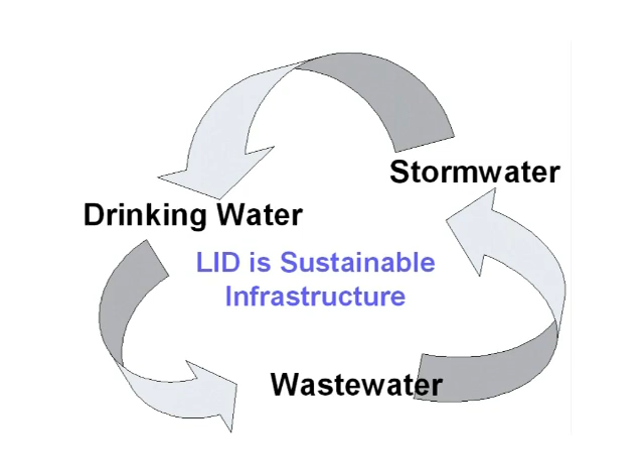I've seen some interesting design manuals say put LID everywhere. I want to kind of kill the myth that what we're trying to do is develop one piece of the watershed puzzle, because you have LID, you have gray infrastructure, you have centralized controls, and you have restoration techniques. Put them all together and you have a very powerful watershed tool.

The key to LID, and a lot of things you're going to see today, is that it's technology and performance based, which is quite different from the typical stormwater structures we've been seeing. What we're really doing is making stormwater into a business. We're making it into an industry, which is quite different from the traditional approach.

So instead of having a pond built the same way every time, we're trying to look at what is the most efficient technology and let the marketplace decide, let the local region decide what it is, and let the market really develop the new techniques.

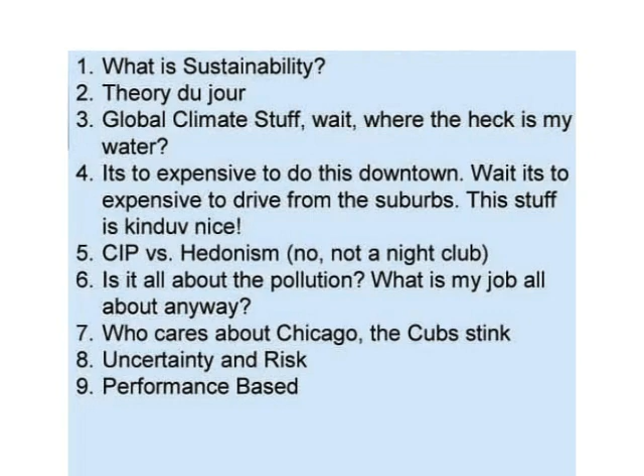I think one of the issues we look at first is what is sustainability? I had the opportunity yesterday to work with the National Capital Planning Commission on the new framework plan for the mall - not the Mall of America, but the mall in Washington, D.C. One of the things is, what is sustainability and how are we going to define that.

We have some very broad, transcendent issues now, like global climate change, which really didn't exist a couple of years ago. But we still have the challenge, especially in water and stormwater, of providing people with cheap, clean water. We still have those basic needs.

Things have changed. A few years ago, you heard it's too expensive to do all this nice green stuff you're going to see downtown in urban areas. But then something happened to gasoline a few months ago. People want to live downtown because they can't afford to commute. Downtowns are very important areas that people in the suburbs are really looking at moving into.

Plus the whole issue of equity in urban areas, which we'll talk about. And then CIP versus hedonism - no, not the nightclub, hedonism is actually an economic term.

People have gone from saying, how much does it cost? Because we traditionally look at things in infrastructure as how much does it cost over time. Do people want it, and you have to provide it to them. People want green streets, right? People want this stuff. So there's this huge new way of looking at costing that we have to get interested in.

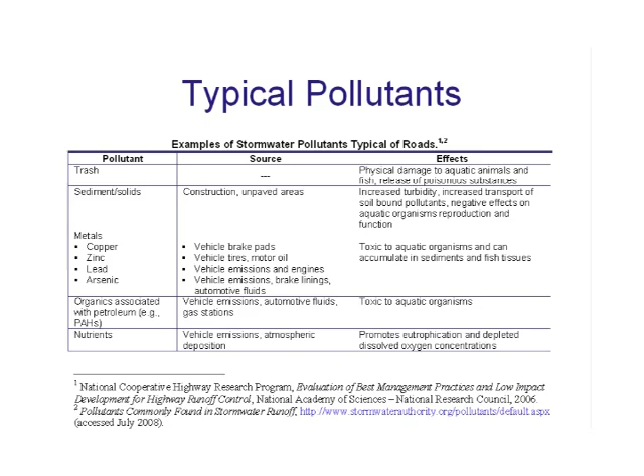But now, as people in stormwater and as transportation designers, you've heard the term context-sensitive solution. I'm just curious how many people have heard that before. It's very important in transportation planning, but people don't always do that.

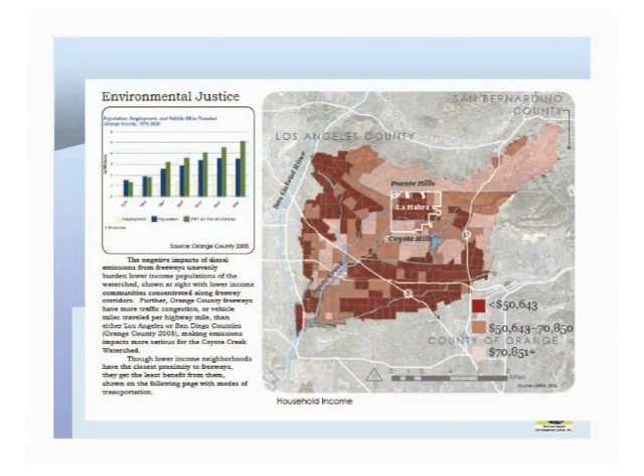But we look at water supply - this is a really nice document, the Coyote Creek Master Plan out of California. We're going from just stormwater to things like water supply, to environmental justice. How can you provide equity, green equity, across cities? It's really important - we'll show some pictures.

But looking at things like soil moisture and vegetation, they have such value. We're not really shameless self-promoters, but we did this work on soil moisture and vegetation 12 years ago, before people were talking about how you can do large-scale areas in cities. This is really a precursor to green infrastructure, to looking at treating stormwater.

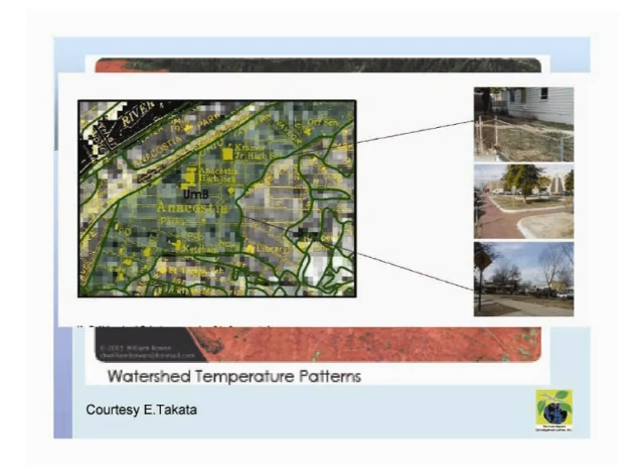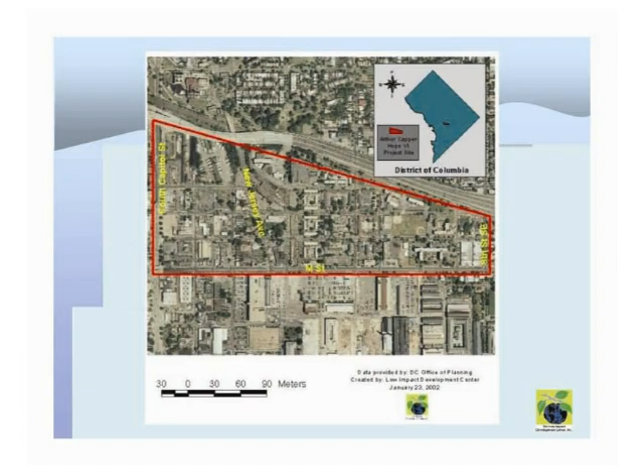Some of the things we worked on in our first couple of grants - I always like to look back. This was a Hope 6 project, one of our first grants to look at using the transportation network and land use patterns in urban areas using decentralized or LID controls. And we came up with a series of templates.

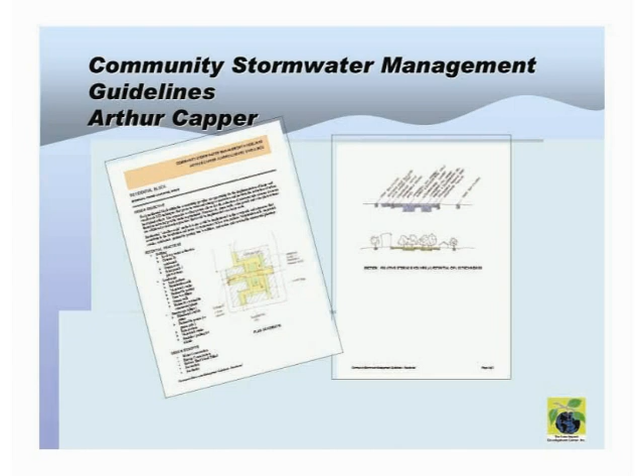So once you come up with concepts, you can figure out designs and ways to build them. We came up with some very simple basic tenets, or systems for design. I'm curious, how many people have gone to our website? There's so much stuff in there, lots of good stuff. Hopefully you'll load it up. And then how to take that into reality.

This was a project we did. It's a transit-oriented development in Washington, D.C., Vienna, Virginia. We worked with two of the nation's largest builders, I guess they're still in business, Pulte and Centex. And we put LID in the streetscape.

Very interesting, we talked about risk and uncertainty. We actually had to do redundant systems for approval for this. We had to do conventional and LID stormwater because the county engineer said, we don't know if this will work or be maintained, it's a big experiment. The developer actually came in and is going to do monitoring for this. But it's one of those issues of risk and uncertainty.

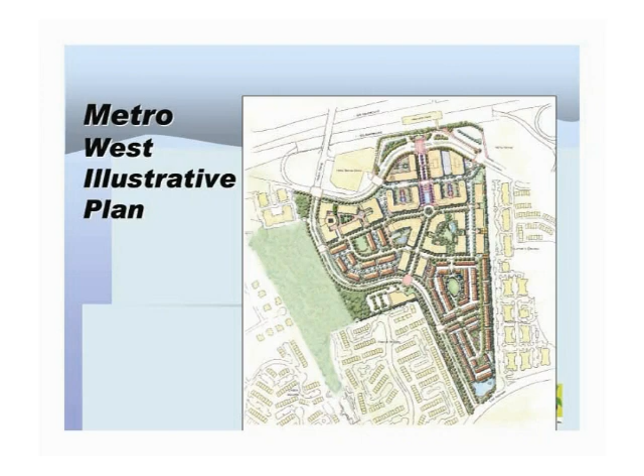I was also asking the developer why he was willing to do all this. He said, this is a billion dollar project, it costs me $22,000 a day in interest. If I have to pay a little more to get it approved, I'll be more than happy to do that. But the engineers were saying you couldn't build swale-type systems in urban areas.

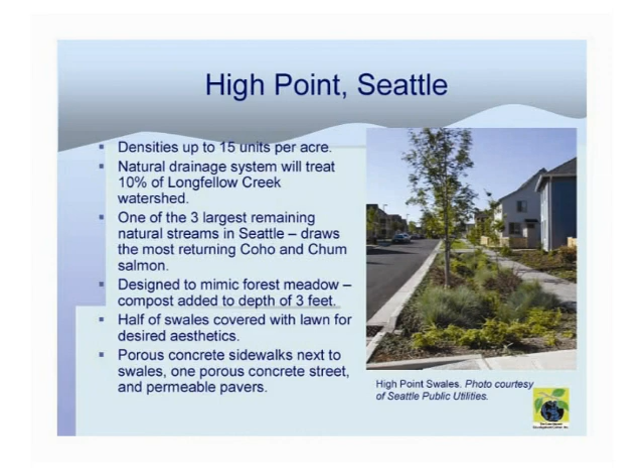This is in High Point in Seattle. But they built it there, and it looks pretty nice. Or you could have these open grates and systems where people run off the curb if you have a curb cut. This is in a very highly urban area on a local street. So people are figuring out how to do this and how to adopt it.

There's some keys to that. But besides planned things in cities, there's also unplanned growth. There's stuff that just happens organically.

Well, someone buys this and does this with it. There are no codes or ordinances to deal with that. Now there's maybe 3 or 4 cars and maybe more than one family living there. A huge change in pollutant load. We're not even addressing this, and the volume that comes off these sites. That's a big part of it.

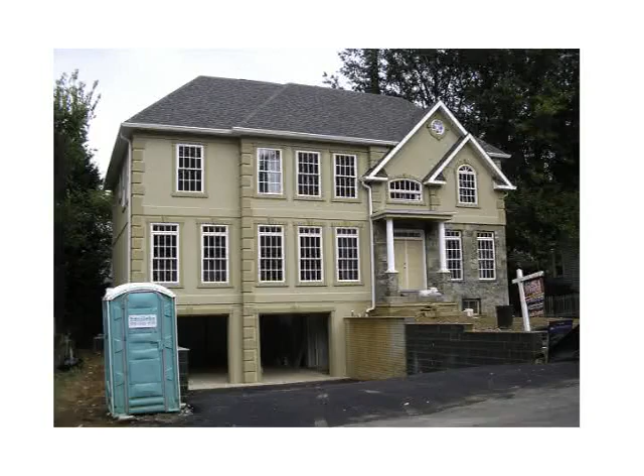This is near my house in Montgomery County, Maryland. I like this because a couple years ago this house sold for about $700,000. This is in Bethesda. Now it's probably back to around $140,000, when I could have bought it when I first got married. But someone takes that and builds this on it, and it's $2.5 million. And actually, they give you a bathroom—they take away the porta potty.

But this is causing huge flooding problems in the urban areas. And people with lots of money complain a lot. So Montgomery County, Maryland has done a rebate program and a grant program where they'll put in permeable pavements and surfaces, and work with a contractor just because they want to get it going in the neighborhood. There are some big impediments to really doing this.

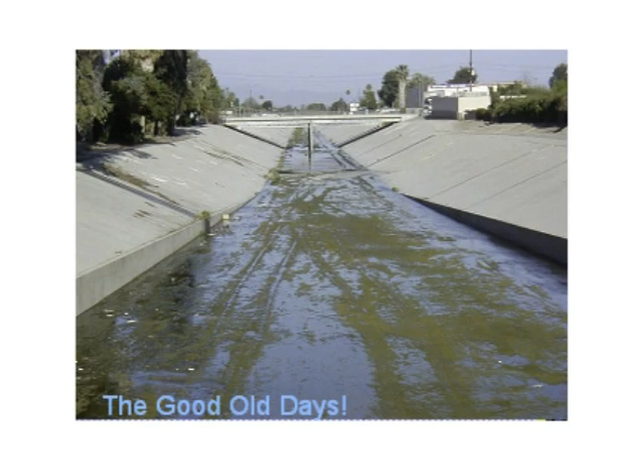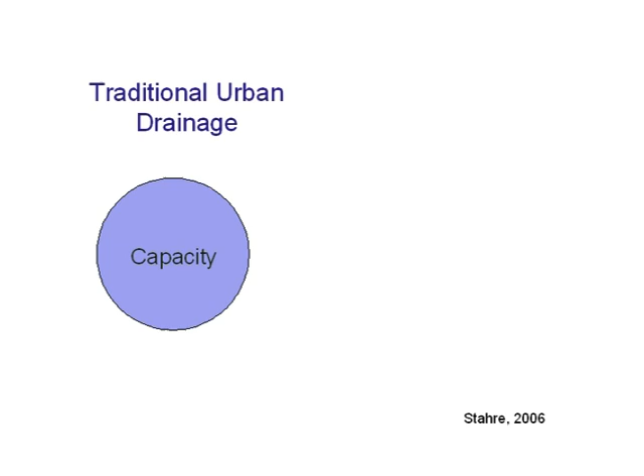I just want to jump a little bit. This is the way we all learn how to do stormwater, right? That's changed, there's great firms, I know there's lots of people out there. Michelle, you'll have to raise your hand, because Michelle's done lots of great stuff. I don't know the name of your firm, but she's been doing this for a long time—it's just Michelle's place. So we've gone from this capacity model to water quality, and now amenity. Getting people to think in this mode is really critical. It's a lot of training.

Well, this first project was designed for 4 evergreens, 3 engineer plants. It failed. I was brought out to the site and asked why this failed.

First thing I reached down, there was 6 inches of mud, and below it was all the mulch and bioretention soil. This is just because of bad sediment control, and the design looked bad. So there has to be not only the design, but understanding how to build stuff.

Now, this project was a failure, and actually we designed it. I fail lots of times, purposely and non-purposely, but I always say it's on purpose, right? And here was an issue where the design was great, had the right spec.

The contractor, the state highway people said, we'll inspect it, don't worry. The guy put mud in here, and he says it's bioretention soil. We said no clay or minimal clay. I picked it up, and a big clay clod came out of it. Okay, it's going to fail, and it was just a swamp.

And then he said he was going to charge them, like, to dewater it, I don't know, like $4,000. And I just pulled the cap off the drain, and all the water came up, and he gave me a really bad look.

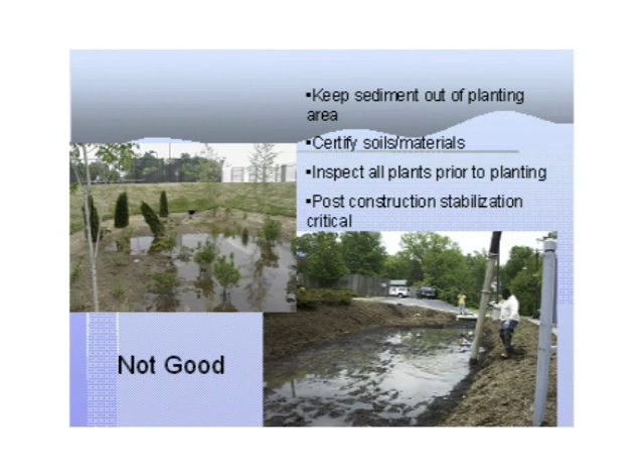So we're going to go through lots of iterations of this stuff, and it's not all going to be perfect. So how do you get there? How do you start building these green streets, green highways?

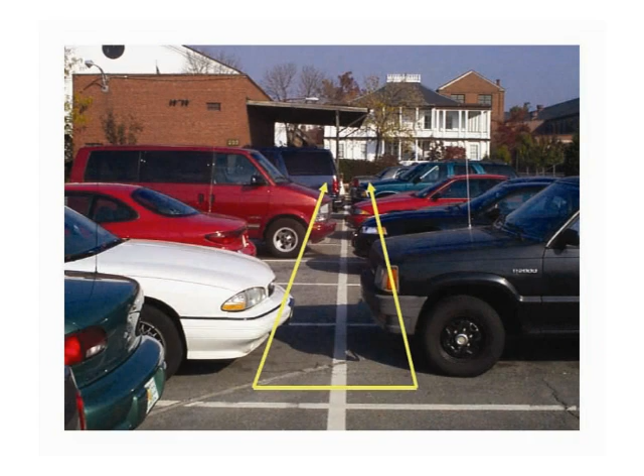Well, we started working with the Navy Yard back, our first projects, our first pilots, and we looked at technologies. I always say, and I love this slide because it's the history of the United States in a pavement section. They came over, the shipyard, the Navy Yard, put ballast, used the ballast, the stones for pavement, concrete, asphalt, and all that stuff down there. The black stuff is oil spill, which made it a hazard site.

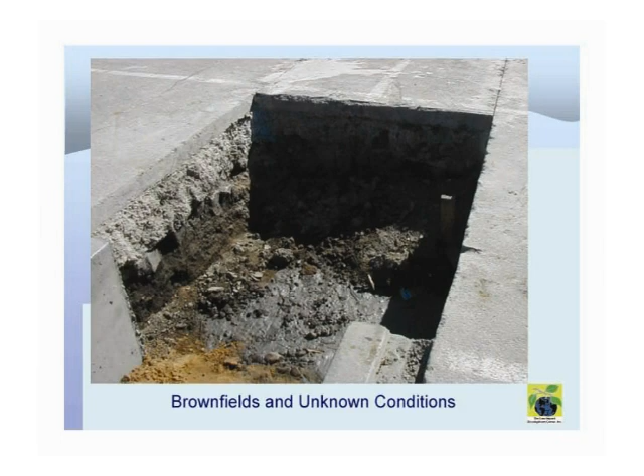So we had to line this site. I used to do some geotech work. And you can see here's the bioretention. This is really a filtering device. We couldn't put all the trees, it's a safety measure. But here, this water is retained and filtered.

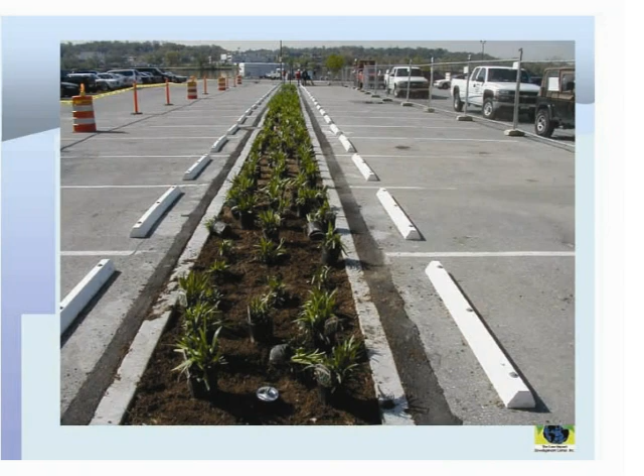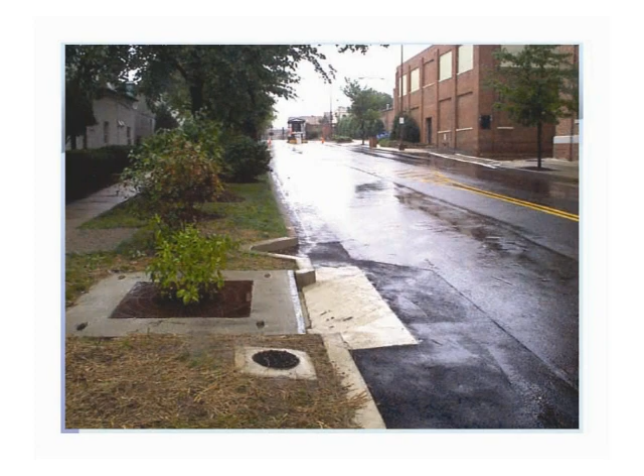But the thing is, we started developing bioretention in a very, very urban area. And then we came with different modifications. How could you do very small areas of bioretention? Or how can you take other technologies such as a street tree filter box? This is a manufactured device, but how can you vary it? Let's look at the impact in the process of vegetation, soil, and salt issues, so we can really start to look at these things that we're going to do long term.

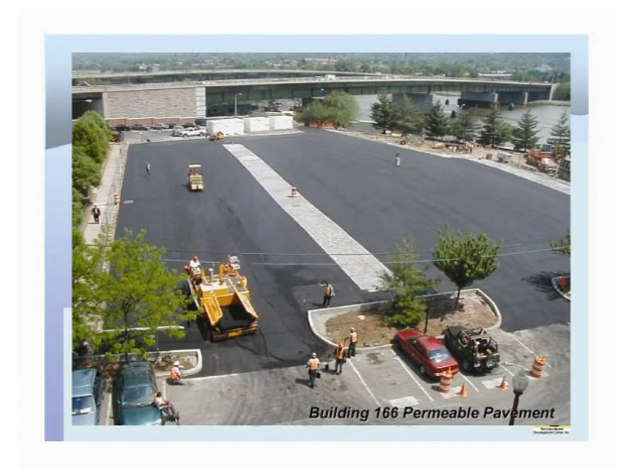And then we took pavement projects, and we put them, for example, here, this is a permeable pavement thing that we did with interlocking pavement blocks about 10 years ago. And of course, all parking lots have to be painted, people can't figure out where to go. This lot's been here about 8 years. It's never, ever been maintained. It's not getting swept 3 times a year, but it still works pretty good, just some little localized clogging.

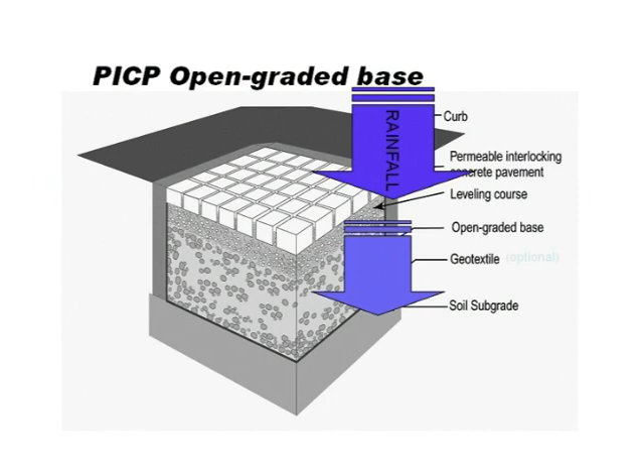So we start to understand how to build this, right? So we can take this pavement section, it can infiltrate water, and we can figure out all kinds of fancy calculations. Maybe if the ground is right, some of it can go down into the ground. Some of it can actually be used in ET.

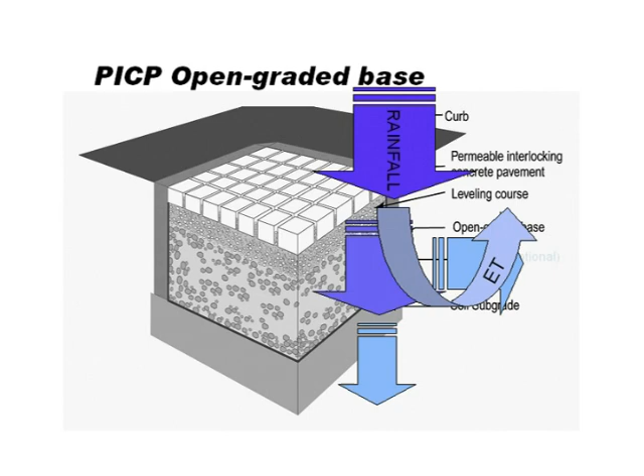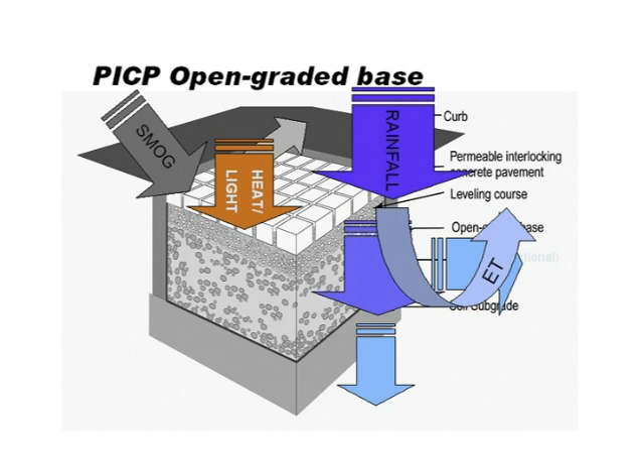People are using blowers through this to actually look at increasing air quality, or you look at smog. We can coat this stuff with nanotechnology, we can use paints, that's an emerging science. So we can really look at how to make this even more effective for other issues. We can look at heat-light effects by different colorings, we can look at the energy demand.

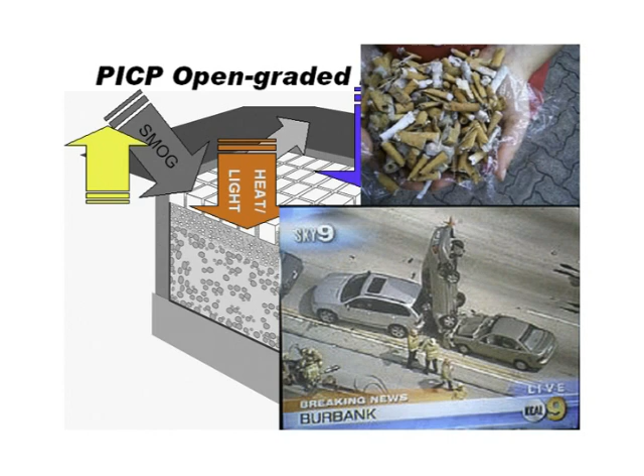And then we can look at trapping trash, because everybody still smokes, or some people still do. Or safety, right? But certain things we can't remove. If you have dogs, you know, there's only some limitations, or pigeons. These you just shoot, get rid of. But we can actually use this at large scale.

For example, the Port of Oakland's looking at, these aren't permeable, but pavement blocks, because it reduces the amount of time to repave over time, which costs money.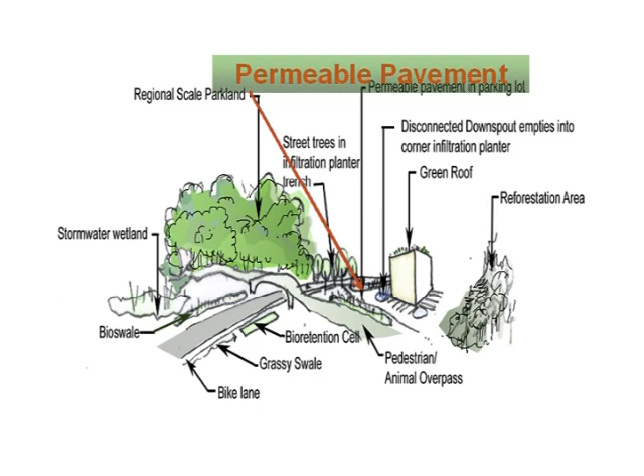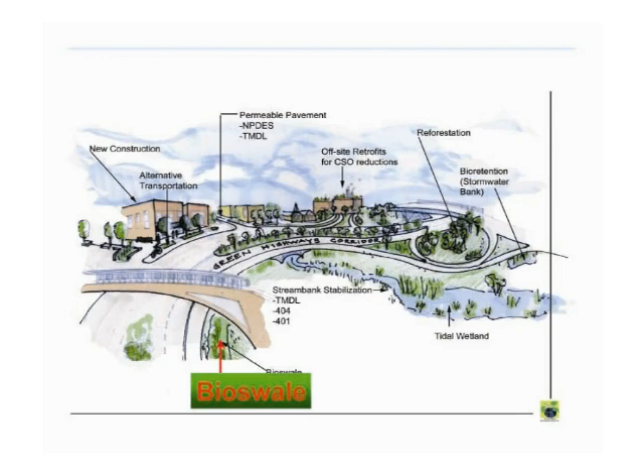So we can take these things and put them in public and private right of way and start to weave this functional landscape, just looking at one technology, right? And then we can start looking at how to get permit credit for it. How do we kind of measure it? And this is what people are doing now, how do we build it and construct it and maintain it over time, right?

And so when you have that, you can start to have strategies. For example, this is a road near my house. This is Montrose Parkway. I live in another Montgomery County. We're about the same size, about 1 million people. And this is the most expensive road project they built. It's about 1.5 miles at $60 million. What's wrong with this picture here?

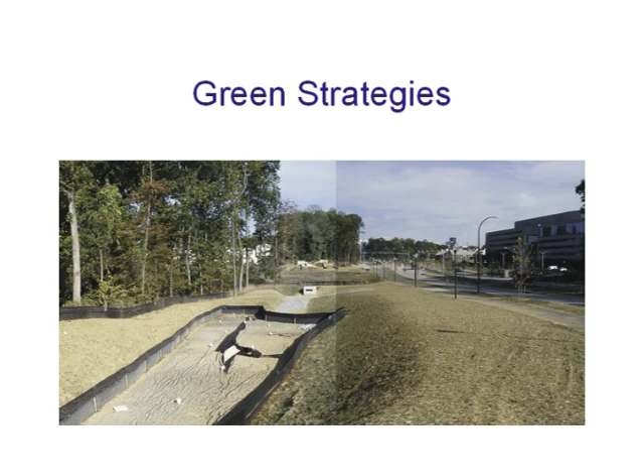The stormwater control is larger than the roadway, okay? And this is Class A office space. I don't even know how much this stuff costs a foot. And could that be more meaningful in an already degraded urban area?

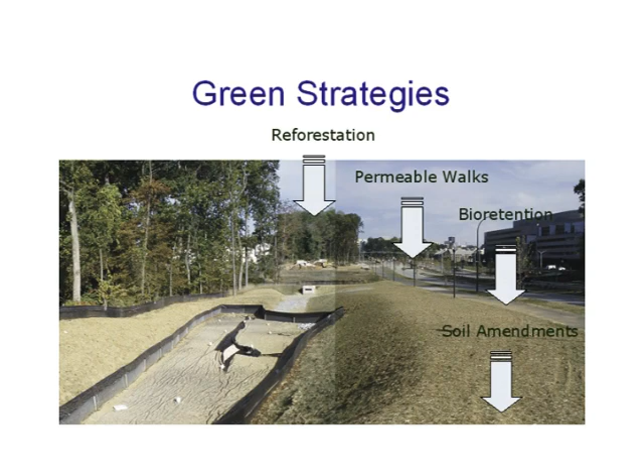So could we use reforestation? In Maryland, we have one of the strongest reforestation laws in the country. We're cutting down trees to put stormwater ponds. Can we use permeable walks, bioretention, soil amendments to replace that function and keep this green?

An important part is technology. We did these with the University of Maryland, and these are kind of advanced filters. Now, the neat thing about this is when we put these in, these are experimental designs, and when we walked down the street, all the shop vendors looked at us and said, 'You're not doing anything more here, are you?' Because they had a streetscape program down the street, and it totally disrupted the businesses for months.

And in an urban area that's marginal, messing with business is not good. But actually, we found we can construct these in a matter of days. We made them shallow. We didn't have to disrupt the utilities. They're very highly effective. But what's interesting, the state won't give us credit because this doesn't meet pre-treatment requirements in their state manual. But this is more effective than any state BMP that they have for the pollutants of concern.

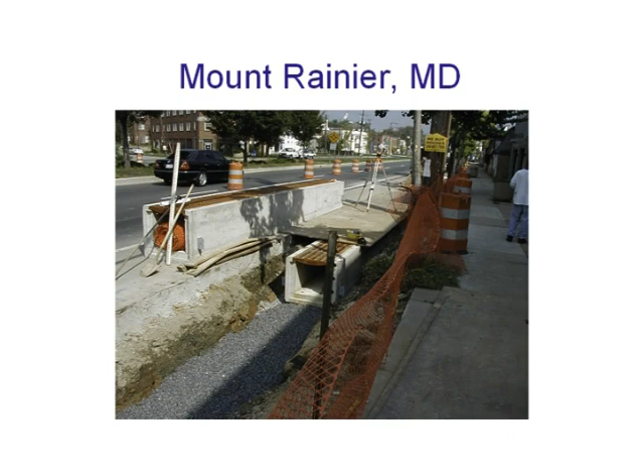So the fact is that in urban areas, utilities are all over the place. If you use small-scale controls, they're adjustable in the field. And they can be put in quickly.

Actually, I happen to be driving down, this is contractor world. This was a state and federal holiday. It was like Veterans Day. And I just happened to be down the street. What happened is the contractor offloaded the truck right in the middle, no maintenance of traffic, no anything, blocked all the lanes and put the box in. And this happens.

You know, it's really important. Even in all construction, people are going to do stuff the way they want to do that.

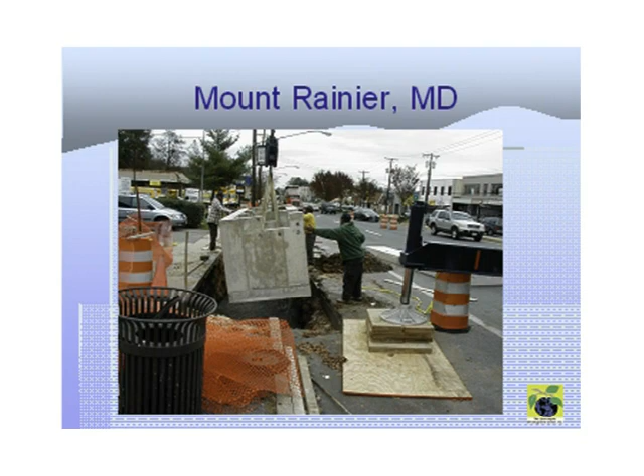So let's take all this stuff conceptually that we kind of showed you, and let's say you have two kinds of highway areas. Let's take all this, and what we can start to do is start to bridge those as we rebuild and look at corridors.

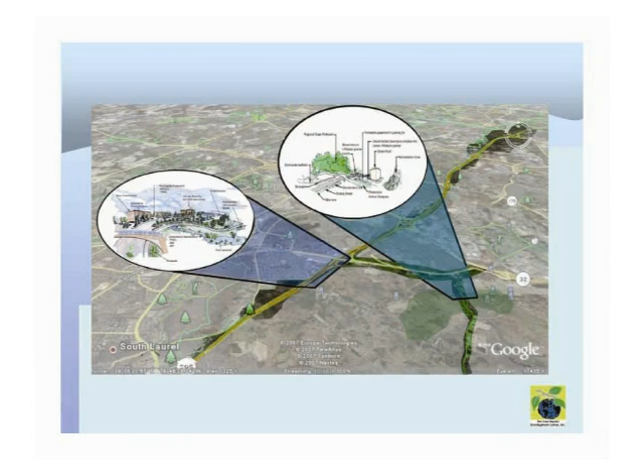And just to show you some things that this isn't all crazy, I know you're started doing this here. Portland's been doing this for quite some time. Seattle, Washington, the SEA Streets program, and actually someone who works with us now, Darla in our California office, was one of the program managers for this. What was interesting, everyone said this road is so expensive, right, when it was first built.

But the second and third generation, they optimized the storage, they optimized the construction, and the cost went way down. And that's important. It's going to take several generations, it's going to take a marketplace. If you can only find one person to put in permeable pavement, of course it's going to be expensive. But if the demand is there, the price will go down.

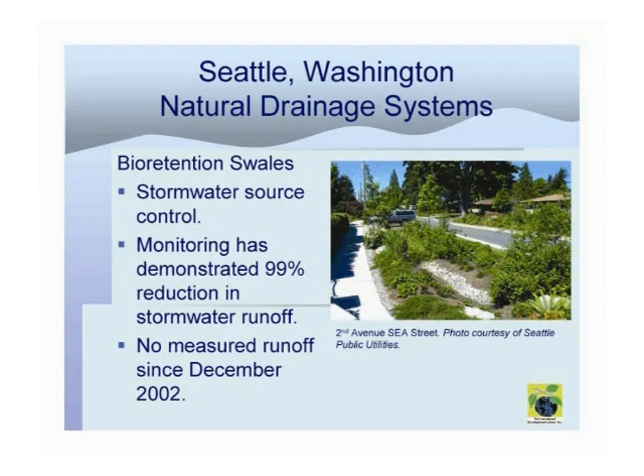But it requires, you were talking about all the guidebooks and all this. This is a 14-foot road, and I always say, here's all the adjacent streets to give it scale. And I used to be called fat, but now I'm horizontally challenged because we're in a politically correct era. But fire trucks, there's never been a house burnt down.

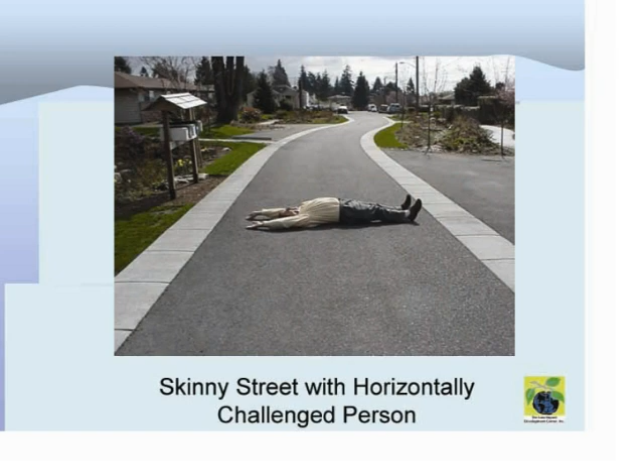People like it, it's traffic calming. You talked about how to get people to walk. People like going down the street, people take ownership of it. It's really very successful. We have green alleys, right?

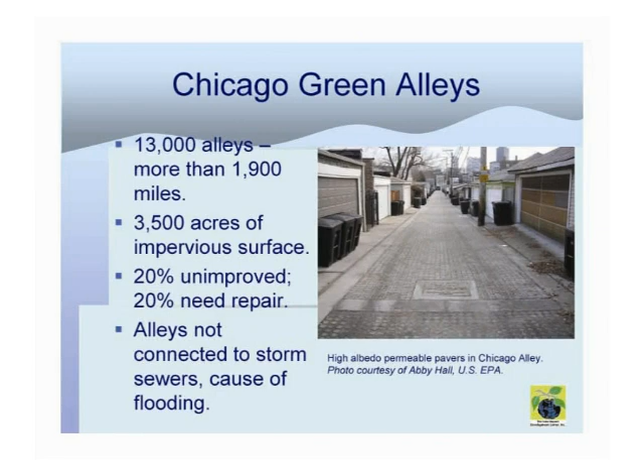Everybody's going to come with their alley programs, working with EPA to come up with some guidance. And there'll be an optimal section based on the way we do business, right? And each city is going to be very, very unique.

A couple neat green streets, green highway projects we're working on I really like. This is from a grant through Federal Highway and EPA through the Green Highways Partnership. And what we're trying to do is not just do stormwater in the right of way, but really leave the watershed better before. Use the transportation network to drive programs.

And here, this is a really interesting site. This is where Marvin Gaye lived back in the 60s. This is not a very nice neighborhood now, but we're using the street as urban revitalization and stormwater, and we're linking it into the park system. So there's all kinds of really neat synergy here where we're using green techniques.

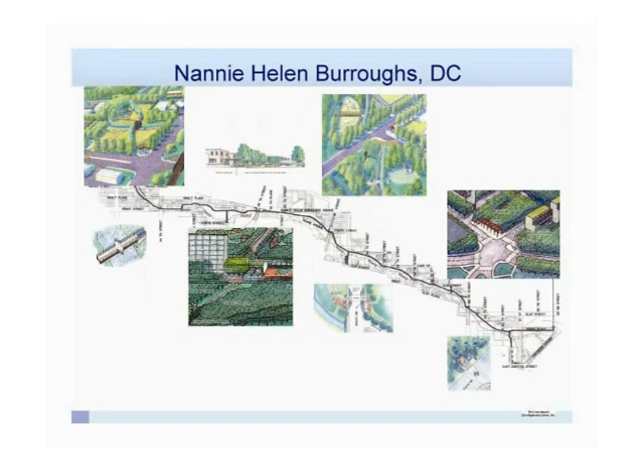These are just some of the schematics. And so here, you can see along the right of way, I don't have a laser here, but that kind of tan area is the road. We're putting bioretention bioswales in.

And we can't just do this by looking at the survey. We have to go out, we have to look at the opportunities, we have to talk to the shop owners, we have to talk to the people who park. There's lots of churches down here. So you say, where do you park? Well, on Sundays, trying to get a parking space out here, pretty tough.

It's hard to tell people that we're not taking out parking spaces, but what we've done is we've actually put in permeable parking spaces, right? And work with some of the owners for access. So here's just some of the techniques we're doing. This will be constructed early next year.

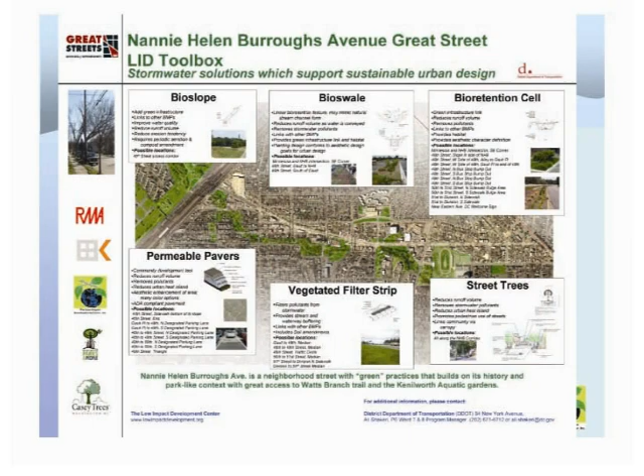So how do you get this? Well, like I said, you can't just do this. And here's another street we're working on in Arlington in Virginia. And you can see here, this is a very narrow street. And we've come down and say, how can you take that straight sidewalk and maybe work with the owners a little bit and kind of change this to a better place to walk.

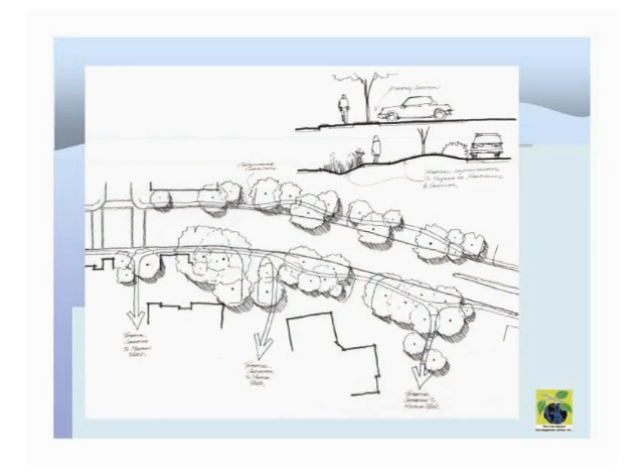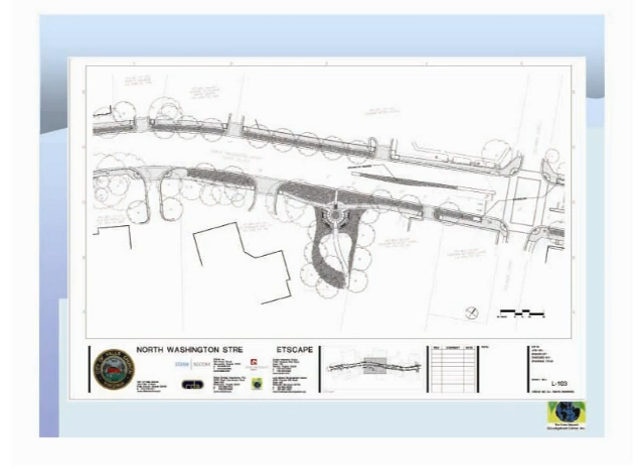And what was neat here when we're working with the landscape architecture team on this, you can see how the emphasis is not to have the street like this, but have the street come out, right? And the street really be part of the fabric. And then you can see here in the middle, there's that little circle, a bioretention area or a fountain, depending on our budget, a permeable pavement. So it's really a sense of place along where you're walking.

Okay, and then when you do that, this is a really good document if you're interested. We did this probably about 3 years ago now. We took all those standards and put them into this Anacostia Waterfront Transportation Standards. So what has to happen is that these concepts, these designs, once we go through them, we have to put them into standards and specifications, and that's actually what we're doing with EPA now.

We're working with several cities across the country to come out with some templates, because even though the pictures are nice, they look good, we have to have a consistent way to build them and construct them. We have to take very, very complex ideas, and we have to simplify them so they can be built in the construction industry.

There's lots of good ideas, I always say, but translating them down to the guy who may or may not even have a ruler when he's constructing this. I always like this - this is one of our monuments in D.C. This is a big chair. There used to be a chair factory down there, and they left this big chair as part of that. So to do this, what we really have to do is come up with a system.

That's what we're really trying to do a lot at the center - how do you take green infrastructure, green highways, green practices, and make them so they go from, I don't want to use the term cradle to cradle or cradle to grave, but how do you take an action? Like, I want to use a bioswale in my transportation system. What do I need to design, construct, plan, get the procurement people to understand it, get the maintenance people to understand it - it's really through this management system, the EMS process.

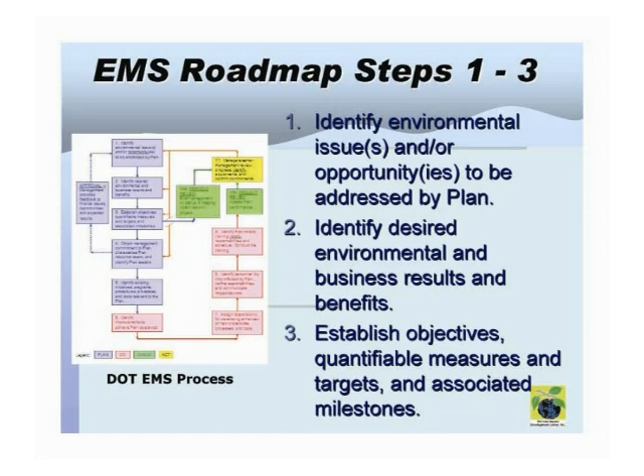AASHTO, the American Association of State Highway Transportation Officials, we've done this through Green Highways, has a very good process, and we've adapted it to the linear environment. I think that's really key - looking at not just doing stuff, but understanding how it's going to be built and maintained over time. That's really our next step once we do the pilot projects. I strongly suggest, if you're doing this kind of work, you should look into the EMS system, especially AASHTO, so everybody gets to have their sustainable development model.

Just have a few slides left here. First, when you're doing something like this, what are the land use and economic design requirements? We can't take a 5,000 square foot lot and make 1,000 square feet of it a bioretention facility. We have limits to some of the technologies. We have to understand what we can push, what's best in the marketplace. So what are our land use and design requirements to do this?

What are the industry recognized standards? If we're going to do this on a mass scale, not everything can have customized designs. What we have to have is some industry recognized standards for materials, like bioretention soils - I know people are working on this, standards and specs, so someone can get it and buy it consistently - or permeable pavement, whether it's an ASTM, American Society for Testing and Materials standard, or a local standard, or a Philly standard. We need consistent standards for this.

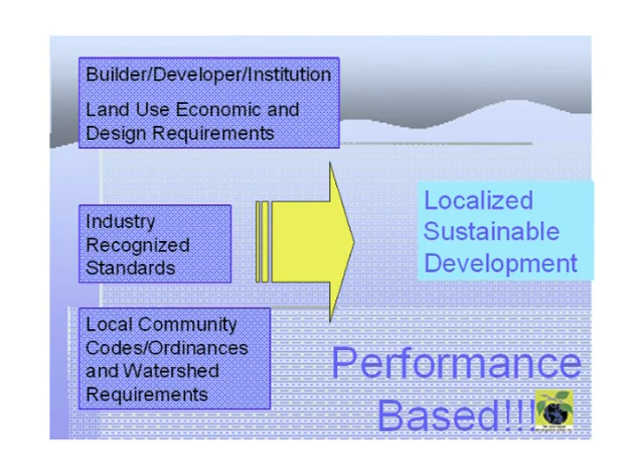And then we need ordinances and requirements. What is required? Is it a code? Is it voluntary? How does it reflect what has to happen in the watershed - these are very key. Once we have those three elements, we can have really localized sustainable development, so we can take these concepts and build them and have them consistently done with some predictability. It's really performance-based - how does this stuff perform? It's not just a rating system or standards, it's about the way we do business.